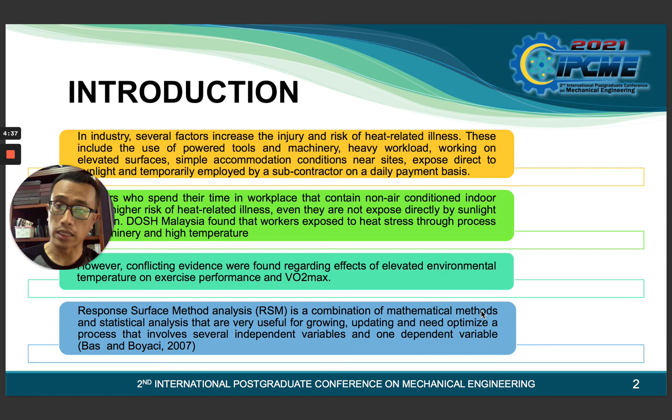So these are the two variables I'm trying to conclude in this presentation, where we measure the temperature and we measure VO2 max. With these parameters, we try to optimize using the response surface method. Of course, response surface methods have been used a lot in various manufacturing sectors, but very rarely in human-integrated work. I couldn't find articles focusing on the use of response surface method to optimize human performance instead of machinery.

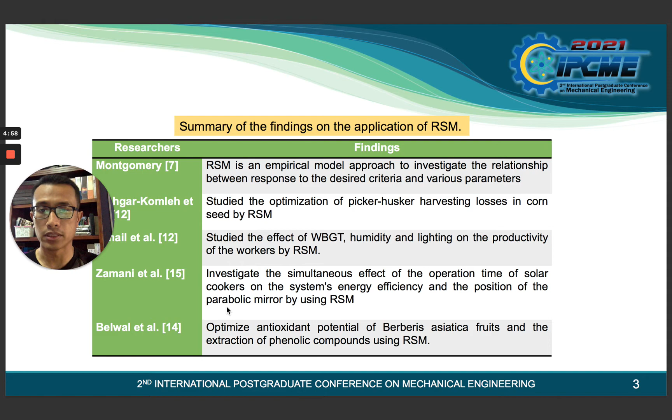Yes, they do have it—so a summary of findings on the application of RSM shows some researchers have come up with similar approaches. I highlighted the use of RSM, but not even a single one utilized RSM for optimizing human performance. So our objective, of course, is to optimize.

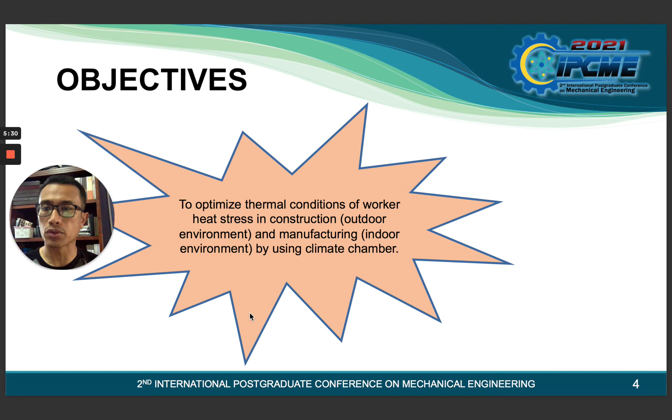Let's say, at what temperature level these workers can actually optimally work, for those working in construction, both outdoor and indoor, too—which means the structure of the building is already there, so they need to do the work internally inside the building.

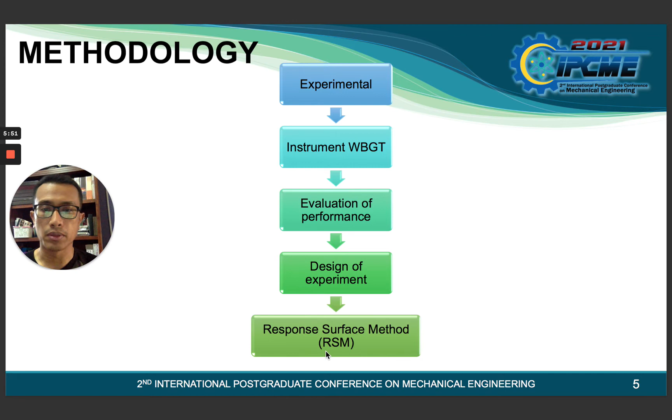So this particular experiment was conducted in a chamber at NIOSH Johor, where we have a simulated chamber. We conducted the experiment and instrumentation, and we evaluated the performance as well as the design of experiment by using RSM. We measured relative humidity and temperature, setting them as level 1, level 2, and level 3, and we also measured heart rate as well as VO2 max, what we call volume oxygen uptake.

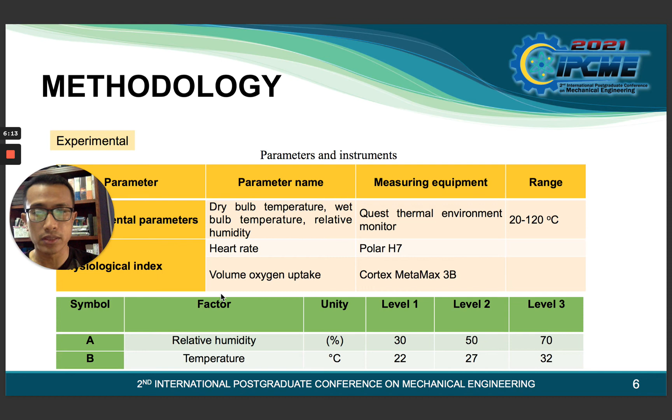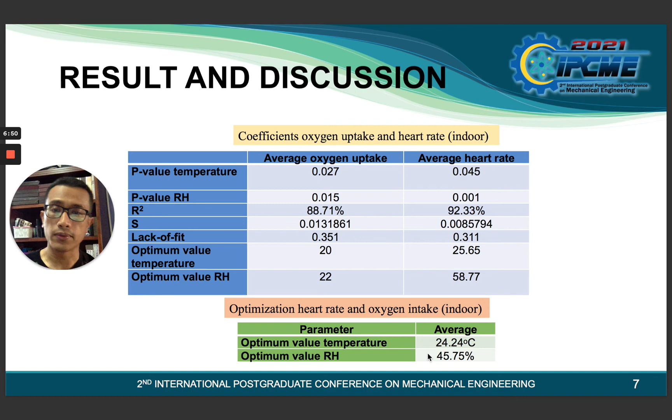Then we simulated the workers, the humans, under level 1, level 2, and level 3 of relative humidity and temperature. As a result, using the optimization, we finally figured out that the optimal temperature value achievable for the work we selected is 24.24. This correlates well with previous studies and the guidelines from ASHRAE related to human comfort. And for the optimal value for relative humidity, it was around 45, which is also highly correlated to findings from past studies.

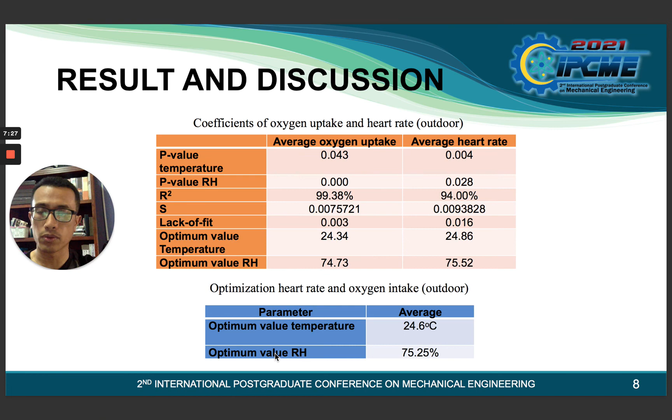So this is actually the combination for the indoor. When we look at the outdoor, we finally figured out that the optimal temperature is also equivalent to that for indoor work. But something that differs is that we found the optimum value for relative humidity can be mitigated at 75%—meaning those workers who work outdoors can also perform very well under the temperature of 24, but at the same time we have to maintain the relative humidity at 75%. So that is the relative humidity value we need to achieve when workers work outside the buildings.

So we finally figured out that RSM is actually able to optimize the overall human heart rate and VO2 max by combining the effect of temperature and relative humidity in this particular case. Another research study later needs to be conducted to find a recommended way to mitigate this for workers, because they work from 8 to 5. So how do we optimize the temperature, maybe with certain utilization or designing experimentation, designing the clothing—that is one thing we are currently working on to look into those matters.